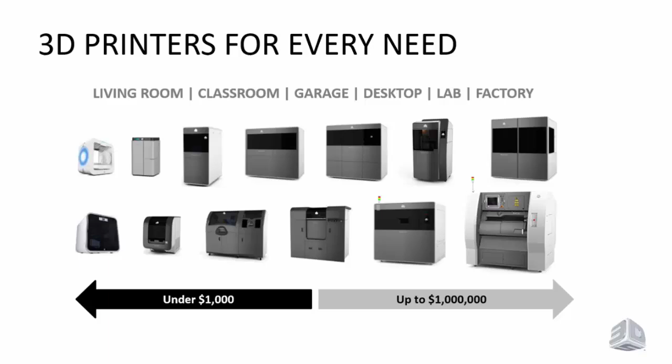3D Systems has 3D printers for every need out there. From under $1,000, our Cube printer is made for using at home, all the way up to $1 million for our production level systems that can print in a variety of metal alloys like titanium, stainless steel, and cobalt chrome, and other materials, plus our high precision SLA production systems that print literally millions of components every year in various production environments. And of course, we have everything in between. Today we're going to be talking in particular about the CUBEPRO, which is essentially our entry-level professional printer that Mike uses at 360Heros.

So when we look at 3D printing, it's important to consider the actual opportunities that the technology presents for any kind of business, whether it's a startup or an established company. We can broadly put what you can do with 3D printing into 5 different categories. There's concept models, which are really all about communicating ideas. The important part here is that you have a really good-looking model - it may or may not have color on it, but it's a way for you to take a product to a prospective customer before you've committed to actually manufacturing it, and sell them on the idea with a 3D print before you commit to tooling.

Or for internal use, for executive management to make decisions, or industrial designers to feel a part in their hand, rather than just looking at a design on screen, to really understand a part and make changes to make it into a better object of a concept model.

The next phase is functional prototyping. This is all about validating ideas and engineering principles, printing parts that have some level of toughness and functionality so you can actually test them in the real world as prototypes. An example would be what Mike is doing. As he designs his products, he creates functional prototypes to test that they work, and he's going to talk more about that.

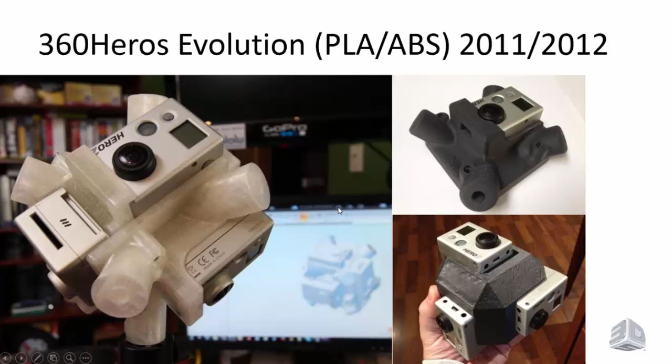With all the different types of tests we were doing, we settled on PLA for our material because it's really strong and rugged. At the time, we used a 3D touch machine when I first started working with 3D Systems, and this was the camera system we were actually using in production. We used a software package for all our CAD modeling, which made it really unique for us because I didn't have to spend a great deal of money on injection mold systems. We could print these models for anywhere between $5 to $10 per model and then market off those models or parts we were creating. So it gave us a really unique opportunity to move into the environment.

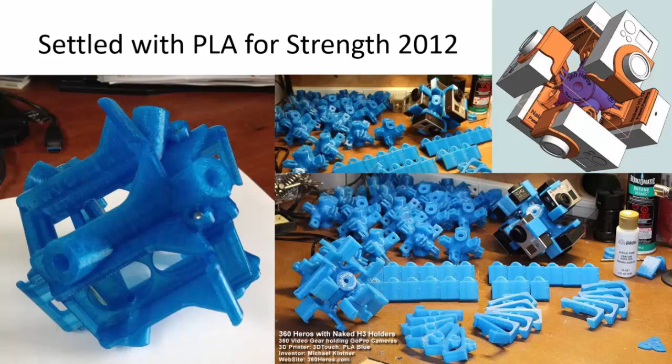Our challenge with this whole company was I needed to build a super lightweight solution. It needed to be quick, easy, and inexpensive for CAD modeling, and it needed to be a reliable prototyping printing solution, ABS or PLA. I did a lot of research with a variety of companies and chose 3D Systems because they had everything from the CAD modeling side right through to the printing side. I needed a strong enough material for production, and that's where we chose PLA because it was very rugged. I also needed something I could put my hands on - I'm a very visual-oriented designer and entrepreneur, so I needed to design something on the CAD system, print it quickly, and go test it. If it didn't work, go back and try it all over again. That gave me the vehicle to be able to do that.

The next thing I was looking for wasn't just about the printing solution - I wanted to know if I could take what I've got and migrate it to higher end production or even injection molds. Their QUICKPARTS system allows me to do that, which is excellent. The other thing is I needed to be able to roll it out worldwide and roll it out quickly, and more importantly, try not to get eaten by sharks in the industry.

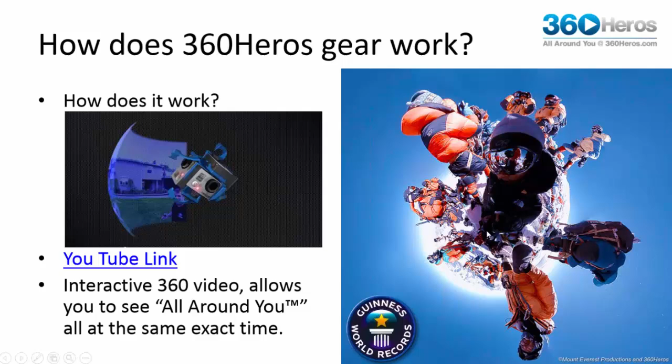What we did was take one GoPro camera, which has a viewing angle of 170 degrees, then we put 6 of these cameras into our 3D printed holder, and that allows us to film 360 degrees on the horizon and 180 degrees vertically. So this area here actually wraps right around to this area here - it's a full 360 photo or video. And here's the same video wrapped into a little planet mode, all from a 3D printed product model.

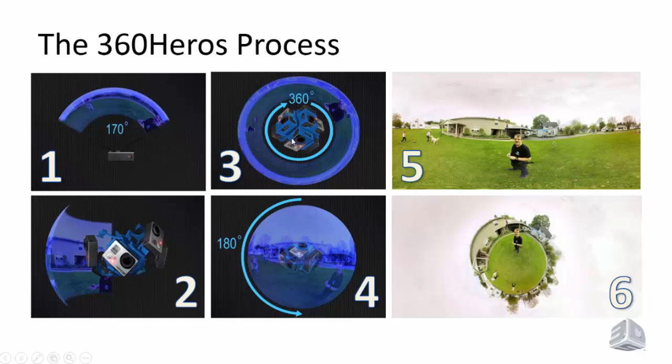Now, the next thing we wanted to figure out is how you create that video. So we're taking pictures in all those different angles, with different camera numbers all lined up. We sync all the video together, with holders from 6 cameras up to 14, and break apart each camera's video frame by frame. We're shooting at 48 frames per second or 100 frames per second, so for every 1 second we have 100 frames, and we stitch them all together to create one larger video.

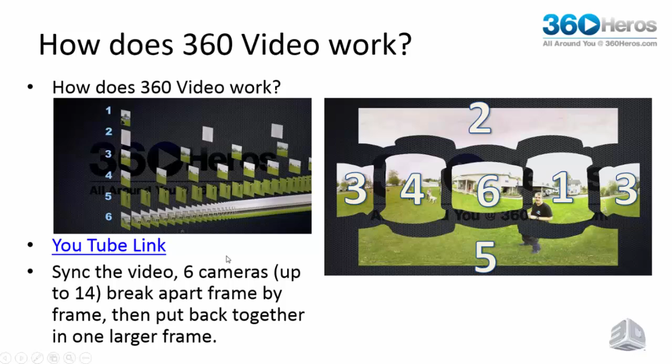With this particular challenge on top of Mount Everest, we worked with a company called Mount Everest Productions, as well as Apa Sherpa, and we trained the Sherpas to shoot the 360 content on the top of Mount Everest.

What was really interesting is when we were approached about doing this project in 2013 was whether the holders would withstand the environment. I'm thinking, okay sure, no problem. I asked them what the temperature was like at the top of Mount Everest, and they said minus 51 degrees without the wind chill. So I said, well geez, I don't even know what type of temperature this will even handle.

So I kind of got in trouble with my wife - I cleaned out my freezer, took all these holders that we printed up, threw them in the freezer, and left them there for a couple days. I took them out, we were dropping them all over the place, and surprisingly enough they didn't break. It worked out very well for us. My wife wasn't too happy with me after I cleaned out the freezer to do this little test, but it was a lot of fun.

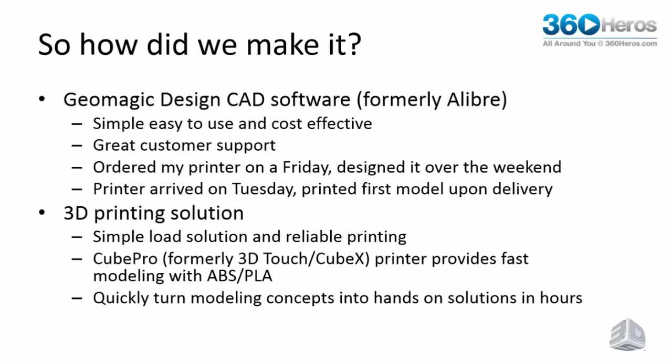So here's an example of this. I had a customer call me up and say, Mike, we wanted a particular camera system designed for a new type of lens for the GoPro. So in Geomagic, we designed our 3D model in a matter of a few minutes.

I took this part and sent it over to my laser engraver, and I actually carved this out of a type of cardboard to see if the part model would fit correctly. Once it did, I took that part and used PLA flat plastic and burned out my part in a matter of seconds on a laser engraver, which worked out really well.

So inside of one day, I took the concept that we wanted to use, created a test model, it worked, so we then laser cut the part out.

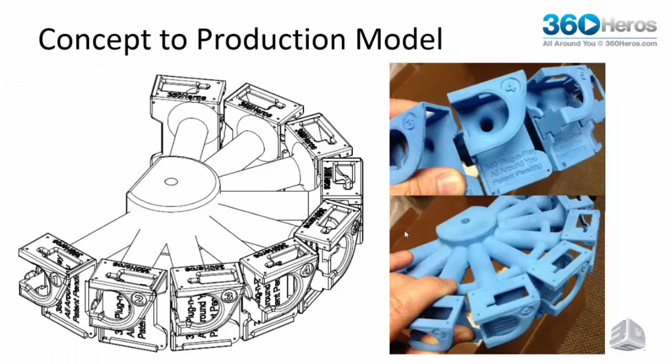Once the customer got that model, they liked it. This is where we did a lot of testing on the PLA machines, because we created this little tiny holder here with the GoPro stuck in it. We used the CUBEPRO to actually create this model so I knew the camera would fit in it perfectly. Once that did, we made one master holder and replicated that all the way around the outside.

Using the next level of technology at 3D Systems, we sent it to QUICKPARTS. QUICKPARTS actually printed this up using SLS flexible nylon. It's really lightweight and allowed me to create this model in a matter of hours, which was excellent. So I took a concept from here to literally this concept, and this was all done within a 3-day period.

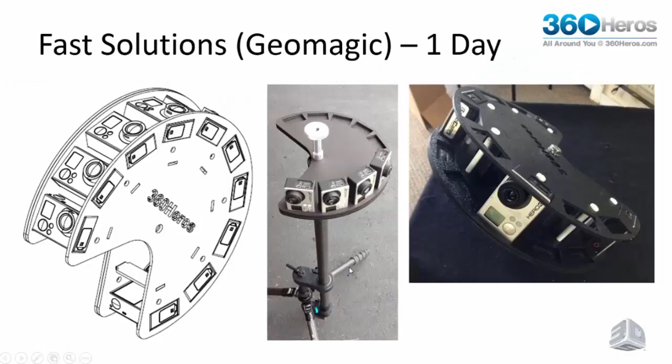So time is money, which we all know, and being able to do rapid in-house garage designs made it really easy for 360 Heroes to be able to turn this stuff out. It gave us great fast hands-on solutions for proofing concepts.

We used Geomagic 3D modeling - we can do the design in 2 to 3 hours based upon what we're trying to do. We would do small holder tests in ABS or PLA just to make sure everything would fit the cameras, and they would print within the 2 to 3 hour period.

We could do laser cutting, which is very simple, by taking the flat designs or the 2D designs and sending them to DXF and then right out to the laser printer. In some cases, we create certain tabs on the PLA type products, and then we laser those PLA products afterwards, which allows us even more flexibility.

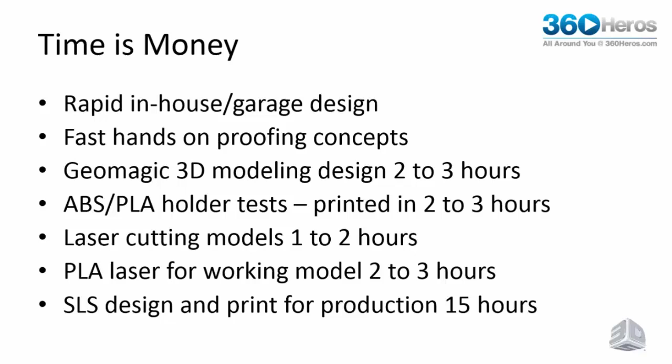And then take all of that information and send it to SLS for actual print production, which works out really well. In that particular case, we were able to convert time to money.

What it allowed us to do is take a 2 to 14 month project, typically in standard conventional means, and now do the whole project in 5 days. The robust printing production solutions allow us to literally create reliable hands-on testing and be able to take the models that we're printing or creating and immediately use them in real-world scenarios.

It was significant cost savings for us because we didn't have to create a lot of jigs or anything like that to hold our parts. We can produce it really quickly, and it allows us to go faster to market and create affordable manufacturing solutions. So with that said, we're now creating 360 content all over the world and selling our products all over the world, which is really exciting.

All over the world, which is really exciting - and in a matter of 18 months, we've been able to do this very, very quickly.

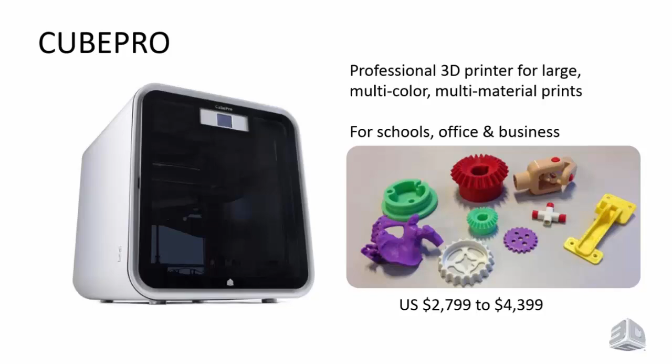I just love Michael's story here. The whole idea that Michael can come up with a concept on a Friday, decide to order a 3D printer and software, and over the weekend model and have a completed product by Tuesday when the machine arrives that he can print out. It just blows me away. It shows that you can create an industry just from an idea over a weekend. It's a really compelling story.

I'm really excited that we've just launched the CUBEPRO, which is making this a reality for so many different people, entrepreneurs in their garage, in their home offices, coming up with ideas and prototyping on the spot. The CUBEPRO is a professional 3D printer to make large, multicolor, multi-material prints. We see people using these in schools, startup offices, and in their businesses, because they can prototype quickly on their desktop.

It's the ultimate drafting tool for a professional, and it has an advanced feature set that makes modeling really easy. What's really great about the CUBEPRO is it makes really precise objects with a very large build volume. You can print something 10.8 by 10.45 by 9.5 inches.

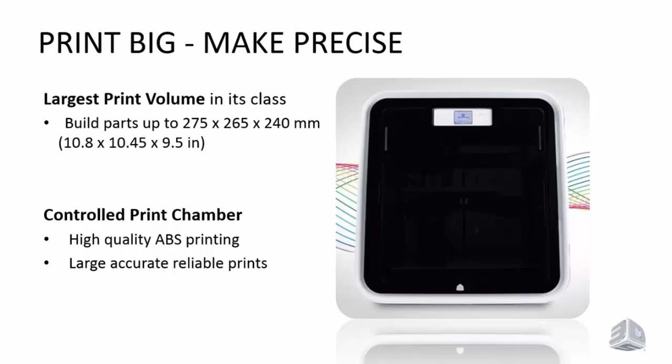This CUBEPRO also offers a controlled print chamber, which gives you accuracy and reliability for effortless printing. You can make very large, high-quality ABS prints that are very accurate. It provides this controlled chamber, so there's no cracking or warpage that you'd normally expect from other 3D printers. This solves that problem. You get very large prints that just look beautiful.

Beyond ABS, we can also print in PLA, which is polylactic acid, a biodegradable material. We're also coming out with Nylon, a very durable and functional material that people are really excited to prototype with. It has a little flex to it, very strong, very hard to break. PLA is just beautiful to look at, with a nice gloss, and it's biodegradable and sustainable.

ABS is what Legos are made out of, so I don't know if you've ever stepped on a Lego—that shows how strong it is. You can actually mix and match these materials together.

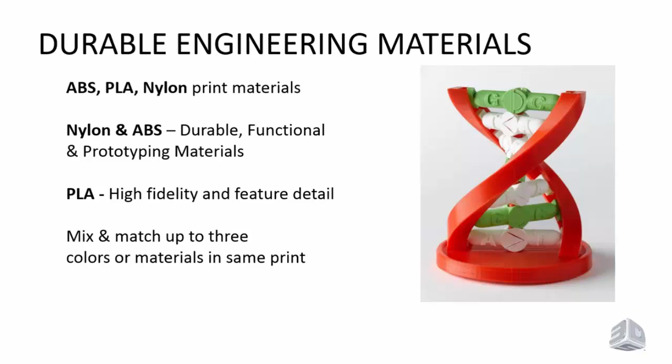The CUBEPRO offers 3 different models: the single, the duo, and the trio, referring to how many print heads there are. If you have 3 print heads, you can mix and match up to 3 different colors and 3 different materials. We have a wide range of color choices.

We have 25 different colors available in PLA and ABS, both offering that. There's even glow-in-the-dark and fluorescent colors. So if you have a special need for a client that matches their branding for a prototype, you can create this, and by mixing and matching colors, you can make really compelling designs and prototypes.

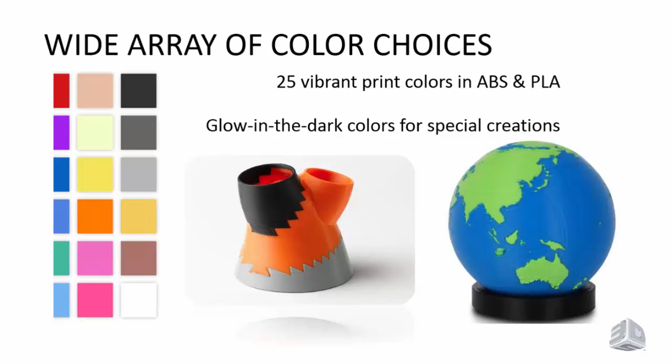Some of the other features that make it easy to use: it has Wi-Fi, works with Mac or PC, and has a touch screen. You can either go Wi-Fi from your computer, or put your designs on a USB drive and scroll through your designs right on the color touchscreen, where you can see the objects and print.

They have easy-to-load cartridges that tell you what material is inside. It won't let you print if you don't have enough material in the cartridge, so there's no waste. It also identifies what material is in there, so if you're looking to print in PLA but your cartridge is ABS, you won't make the mistake of running it at the wrong temperature.

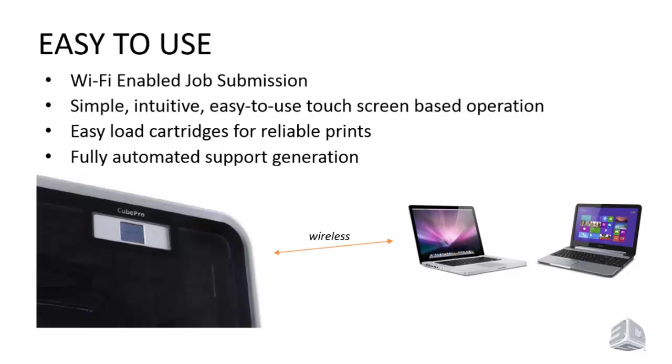There's also features on the software that are really easy to use, like fully automated support generation, as well as easy color tools, so you can choose which colors you want your part to be. You can actually choose right on the shell of the part, and then you can put multiple parts on the platform and choose which colors and materials you want to print in.

The advanced feature set of the CUBEPRO offers professional print quality, with over 27 combinations of different print fill modes and print qualities. You can pick which resolution, down to 70 microns, which in comparison to our competitors is one of the highest resolutions out there.

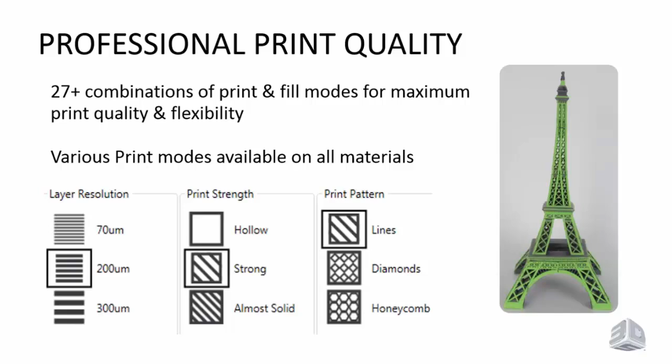There's also a drafting mode of 300 microns, so it can print quickly. You can choose the print strength, whether you want it hollow, strong, or solid, and also the infill patterns, which give a level of support inside the model to create strength. With these combinations, you can create tolerances that are fit for your prototype.

So you get higher accuracy, feature and detail resolution. It's not even layer thickness, it's actually layer thinness - 70 microns is like the width of a human hair. So you get really high quality prints.

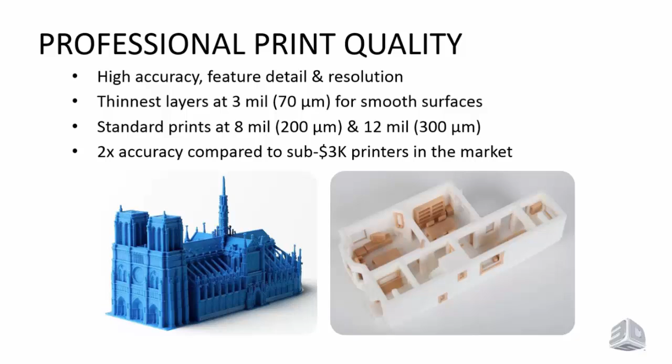You have the choice of whether you want 200 micron or 300 micron if you want to print quickly, if you want to iterate fast. And the accuracy for the market is actually way more advanced, 2 times the accuracy compared to our competitors. So we have 3 different models.

Each of them is broken down by how many print heads you want on it. We have the single head CUBEPRO, which is $2,799, the CUBEPRO Duo that sells for $3,399, and the CUBEPRO Trio that's $4,399.

It depends on how many materials you want to use, depending on the color heads. They all have a controlled print chamber, which, like I said before, is about accuracy and reliability of parts. They can all print in ABS, PLA, and nylon, all have automated supports, and have the advanced feature sets I spoke about.

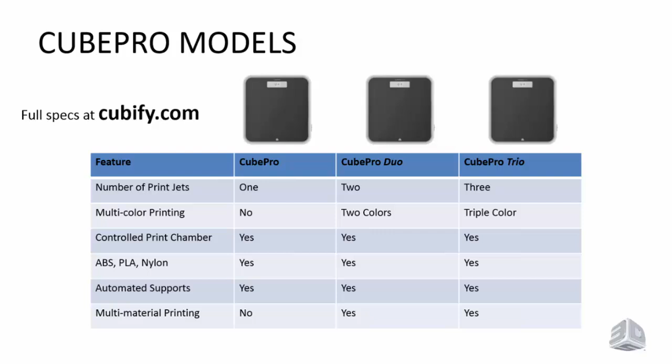The only one that doesn't have multi-material is the single head one, because you only have one head on it. But with the CUBEPRO Duo and the CUBEPRO Trio, you can actually print in all the materials, mix and match the colors, mix and match materials.

Thanks, Keith. So I'm going to talk real quickly about the Geomagic design software that Michael refers to - this is the software that he actually does all of his designs in. Geomagic Design is CAD software.

It's really all about getting from an idea to a working prototype and then on to a production part very, very quickly. It offers a rich set of 3D modeling tools. It's fast, quite straightforward and easy to get started in, as Mike can attest to. Everything that you design in the software is instantly editable.

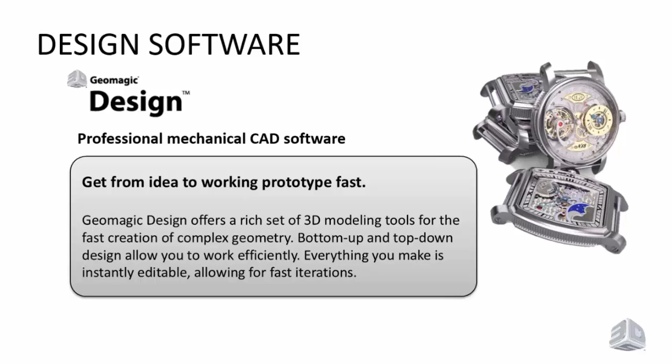It covers 3D product design. It's a history-based parametric modeler, as I mentioned. It has an extensive part library with standard components, which saves you a lot of time - you can pull a whole set of standard components from our library and add those to your design, so you don't have to design everything from scratch.

It offers 2D documentation because, of course, not everything gets 3D printed. A lot of things are still manufactured using traditional methods, and quite often if you're sending work out to a job shop, they're going to want those 2D drawings of the parts so they can machine them, turn them, and do whatever they need to make those parts. That's all very easy to do with the Geomagic design software.

We offer really advanced tools as well in Geomagic Design, including FEA, finite element analysis and simulation, and we have photorealistic rendering in the software. We don't mention it in the slide here, but one of the key things about Geomagic Design is cost. Like the CUBEPRO, it offers amazing functionality at an exceptional price point of $1,000 to $2,000 for the software.

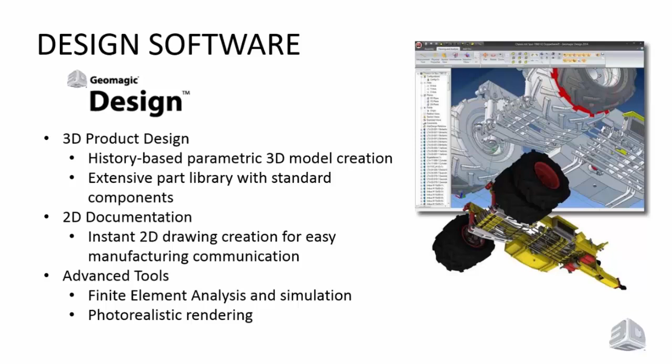Let me switch gears and talk very quickly about QUICKPARTS as well. Mike didn't go into a lot of detail here, but he mentioned that after he has prototyped parts on his CUBEPRO, or previously his CubeX or 3D Touch printers in-house, he will send a final design to our QUICKPARTS group.

QUICKPARTS are experts in making production-level parts, and that includes via 3D printing as well as other techniques, including injection molding. Really the key thing about QUICKPARTS is if you're looking for unique, low-volume, custom-designed plastic or metal parts, it's a great option to use.

We have patented technology for custom part procurement, and we have a team of experts. We have dozens of facilities all around the world with decades, probably centuries worth of expertise among all of our team at QUICKPARTS in transitioning from design to manufacturing. And we have a unique and proven manufacturing services business.

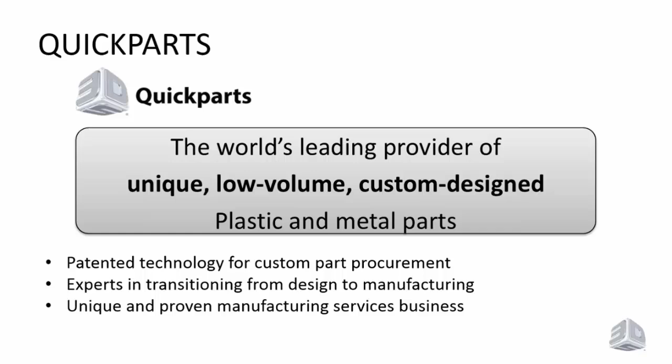So we're not just simply taking a part you give us and throwing it on a printer. We are making sure that we're using the best techniques to make the particular part that you need made.

QUICKPARTS will follow you through the entire development of the product. You can start with rapid prototypes and pre-production models that we'll create. We can create tooling and production parts, and we can do investment casting. We don't note it here, but in addition to investment casting capability, we have injection molding capabilities and machining capabilities as well.

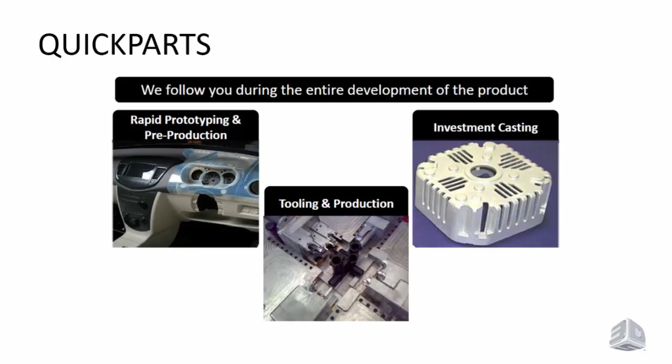QUICKPARTS is really changing the way that product development and manufacturing professionals outsource custom manufactured parts, and QUICKPARTS offers complete and tailored end-to-end solutions from design to manufacturing, and we work closely with every customer to make sure that you're getting exactly what you need.

We're going to get started with the questions here, and I already see several good ones that have come in. The first question is, what printer would you suggest for production? I'm going to take a shot at this one. It's kind of a very broad question - it depends on what types of parts you want to produce.

When we talk about production parts, those can be in plastic, and a whole variety of different kinds of plastics. They can also be in metal. And 3D Systems offers production printers. Our Pro X line of printers, if you go on our website and look, are our production level printers that make either metal parts or very tough plastic and nylon parts, and those are typically the ones being used in production environments, like on aircraft, in cars, and that sort of thing.

That's kind of what we also use, is the SLS material, because it's a flexible nylon, so it's really rugged, and you can build live hinges from it, which makes it extremely flexible and usable in the production world as well.